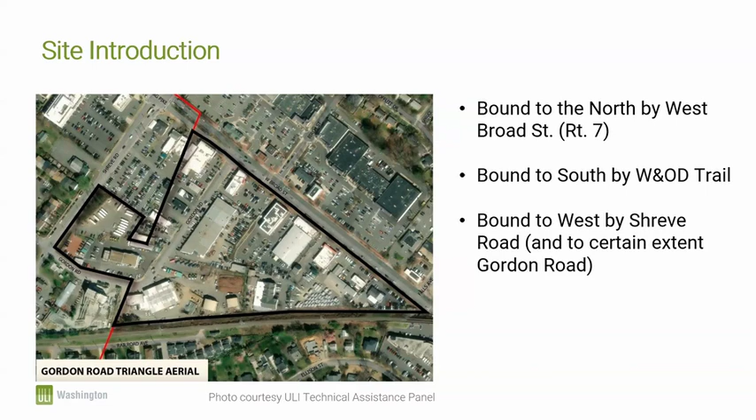From the site introduction, you can see it's outlined here: to the north bound by West Broad, Route 7; to the south by the W&OD Trail; and to the west, Shreve Road, and secondarily by Gordon Road as well.

Digging slightly deeper, one of the unique opportunities of the site is the current mix of uses. You can see on the right a relatively exhaustive list - from the city's perspective we have parking buses, a recycling center, the warehouse, the actual Department of Public Works, a hypothermia shelter, the police impound lot. We also have examples of auto body shops - Caliber, Smokey's, FC Auto, Paramount, Beyer, Volvo, Kia, U-Haul, and the little parcel with Sweet Rice.

We think this is one of the unique opportunities to synthesize and bring together these landowners on behalf of the larger Gordon Road Triangle, along with the city of Falls Church.

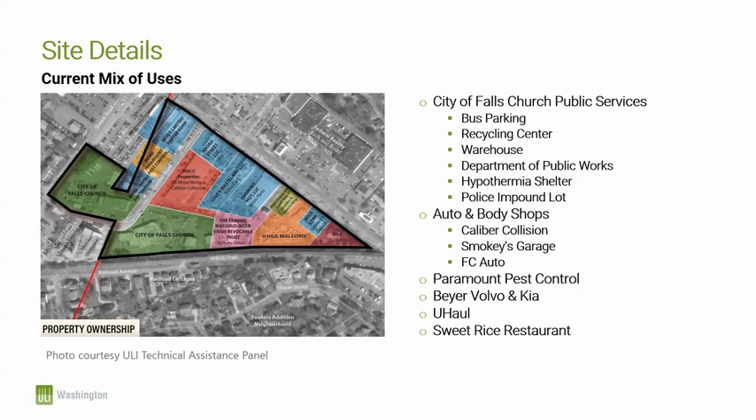Digging a little deeper from a site detail perspective, one of the things the panel has discussed - and you'll see details shortly - is a recommendation to the city to think about and consider developing and investing in your parcels first. We think these two parcels are the catalyst for the larger Gordon Road Triangle. This has to happen first, and everything will flow from that.

We heard directly from the business owners and landowners yesterday that they are willing to enter into this project with the city. They just need the compelling vision from us and the larger plan for Gordon Road to come fully on board. We think that from the city's perspective, starting with your parcels will really set that course in motion.

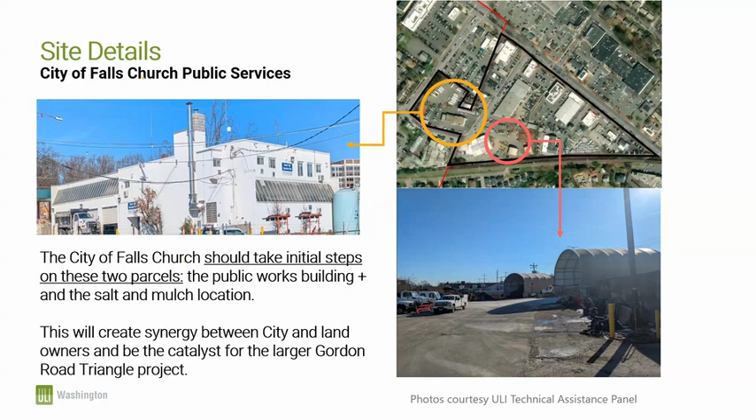One of the recommendations you'll see later has more detail around the tree canopy. There's very little tree canopy currently on the site. We've also identified areas of frequent flooding, which inform some of the vision pieces of what you'll see later.

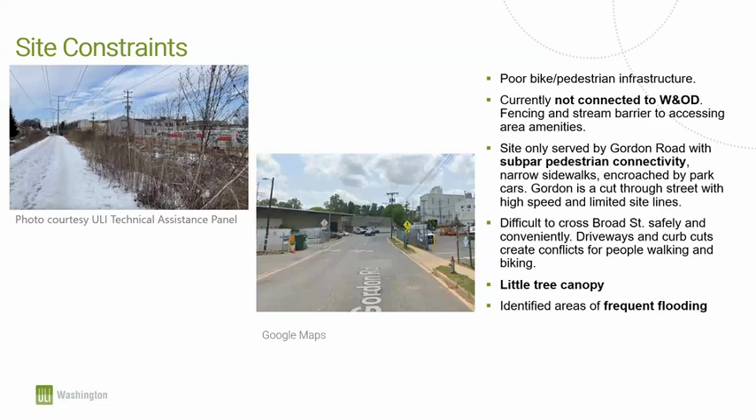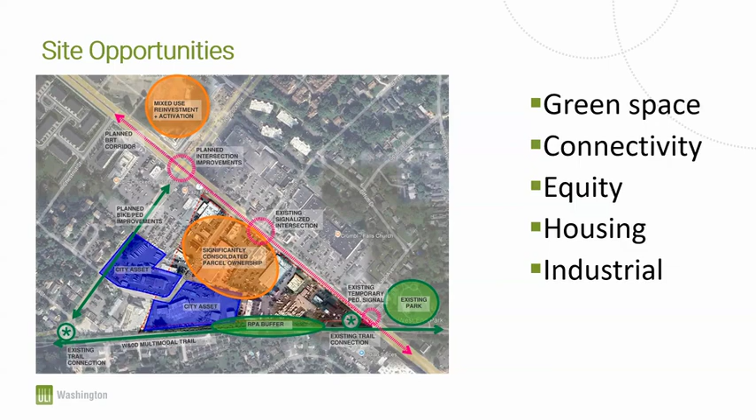Having outlined the process and the task at hand and understanding the current status of the Gordon Road Triangle, we're going to move forward into the feedback we got from our various focus group members and area stakeholders, how we analyzed that in different ways, and how we're utilizing it in the planning process going forward. At a high level, some outstanding items we continue to hear focus on green space, improved connectivity in, around, and through the site, equity, creating equal access to any reinvestment that occurs on the site, and the need for housing at various levels. But also, most importantly, this is currently an industrial area that serves a lot of needs, both for the city and the city's residents. So we want to make sure we're accommodating these uses moving forward.

Green space: the site has the fortune of aligning with the W&OD trail, a heavily utilized piece of cycling infrastructure that stretches throughout the region, and is also at the gateway of the city. Our plans are to utilize that access point, be cognizant of sensitive environmental areas on the site, and pull those same elements into and through the site, creating natural elements throughout the revised plan.

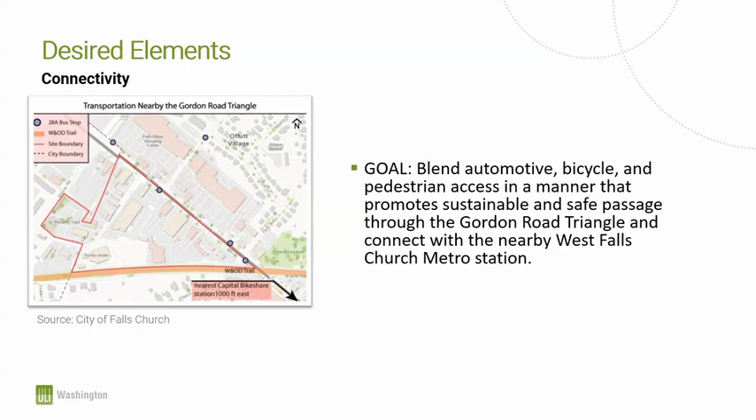Connectivity: the site fronts on Broad, W&OD, and Shreve Road, but the connectivity currently in place needs a lot of revision. We want to focus on automotive, pedestrian, and bicycle traffic through and around the site, connecting it not just around the site but also to the metro location to the west.

Equity: any reinvestment plan such as the one we're contemplating carries the threat of displacement and lack of equal access to that reinvestment. So we want to make sure we're focusing on that as a priority.

Housing is in great need throughout our region and would be a crucial element of the plan. We want housing provided in a range, not just market rate, but also workforce, affordable, and attainable housing, with a heavy focus on the city's hypothermia shelter currently in the triangle. We've heard a lot of feedback about interest in improving, modernizing, and expanding that facility, so we want to make sure that's a focal point.

Finally, industrial uses. We're contemplating different ways where industrial use is not just the DPW facility, so crucial to the city, but also private sector industrial uses like automotive fabrication and other light industrial uses the city depends upon.

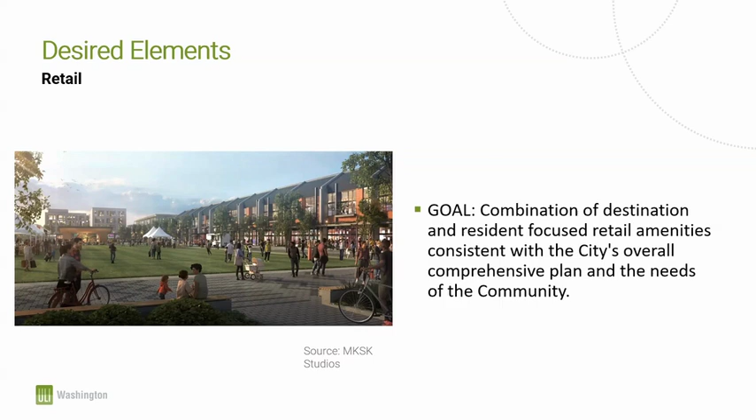Last but not least, retail. Retail in any mixed-use plan like this needs to be addressed. There will be needs for new residents, destination retail opportunities for surrounding residents, so we want to balance community needs with the city's comprehensive planning in place.

You've heard us talk about this framework plan idea, and I want to explain what we mean by framework. It relates to the city services and the ability to unlock redevelopment and improvement of those spaces first and immediately, to address those critical needs. We believe with two or three key chess moves we can do that quickly up front, and then have flexibility in the rest of the triangle space for how that plays out.

So instead of talking about this as a master plan, which makes it sound like we have all of the answers in 2 days, we're talking about this in terms of a framework plan to give you the tools you need to unlock those first few key chess moves. The rest has a little bit more flexibility to evolve in response to the community, the market, and appropriate timing.

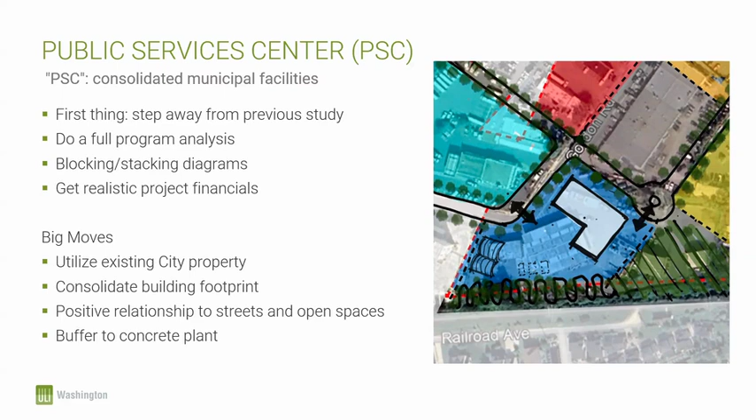Many of you are probably familiar with the new Arlington Art facility. If you haven't seen it yourself, you're probably aware that it has been completed. And so this was one element that was in our briefing book that we heard from the city. We're just putting it back out there as what we think is a good idea to model some of those aspects after. We'll turn it over to the next one.

So Susan and Colin gave you and talked to you about that framework plan, and now we're going to get into some of those elements of that plan. So in the information we got from the city and speaking with stakeholders, one of the questions was looking at possible land uses.

And one of the things we heard both from the city and the stakeholders is that there is a want for housing. And what we've heard is looking for mixed income housing to include affordable housing. So we definitely thought, again, looking at the framework plan and the opportunities here, there is an opportunity to provide housing, have higher density, mixed use residential along the Broad Street frontage of the property.

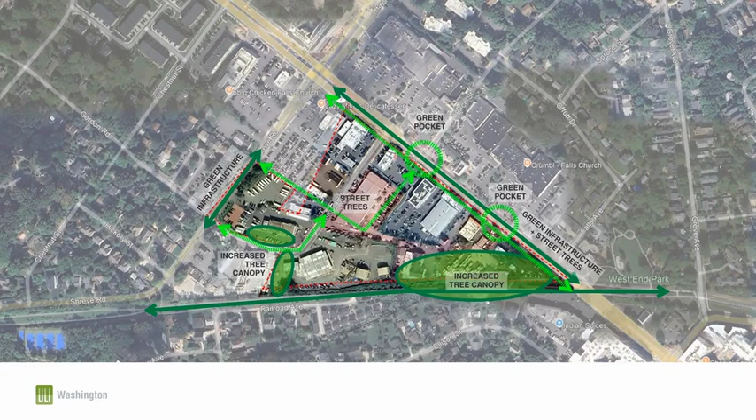One of the things we heard was about the existing tree canopy—there's not much of it. So a major goal, and we think a major opportunity, is to increase the tree canopy within the triangle. Our recommendation is that the overall minimum tree canopy goal should be 15%, and we think there's a great opportunity because of the site's location and proximity to the W&OD trail and the RPA buffer area located there. That's an area where you could get substantial tree planting to really meet that 15% goal.

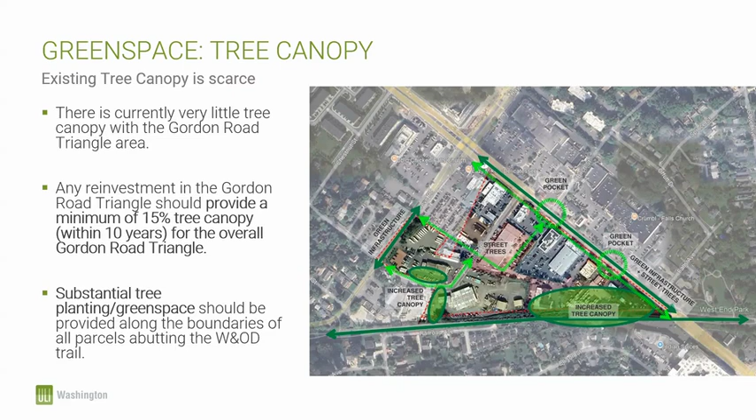So again, the W&OD Trail is a major opportunity for this development. You've got a regional trail that extends from Arlington all the way up to Purcellville, so it's heavily used. I've done a lot of marathon training on this trail, and I've gone through this area many times. Right now, the site has no relationship to the trail.

We think an example of providing that relationship with the trail is in Vienna—there's the Caboose Brewing Company. They have a brewery that's right on the trail, and it's become a real destination. I know running groups and biking groups that start there and finish there, which creates that relationship with the W&OD Trail.

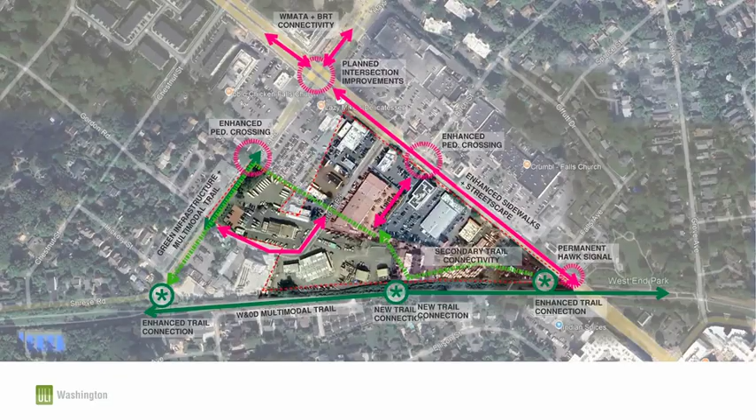On the W&OD, some recommendations are to enhance connectivity—we talked about adding a pedestrian and bike connection down by the Gateway Greenway. This would be a gateway into the site, a gathering space that would feed into that area. But that was just one connection.

Also, this area here would improve the connection at the base of the bike-ped bridge and really open that up. We spoke about open space recreation opportunities where we could do a parallel, slower shared use path for exercise. I know the dual paths exist elsewhere, and maybe this stretch of the W&OD will get that too, but it's an opportunity to provide some of that slower trail on the Gordon Road side of things.

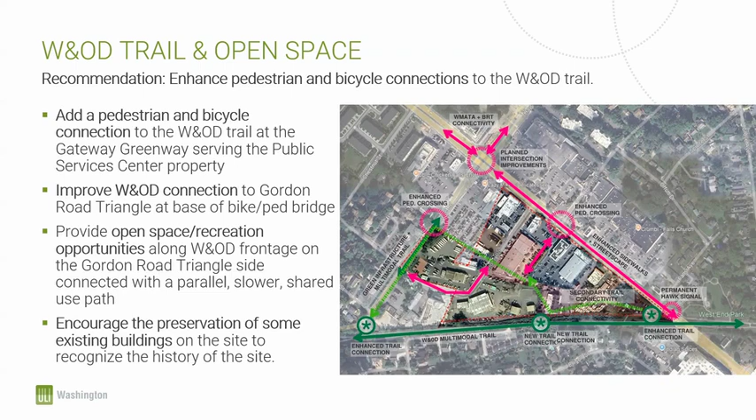And we talked about the preserving of the buildings, so we can move on.

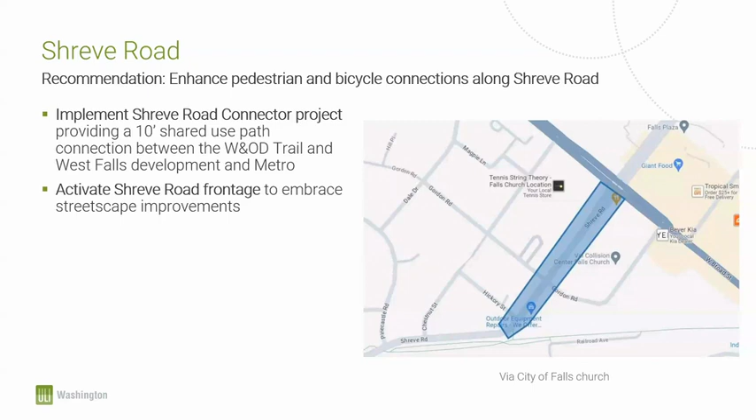So on Shreve Road, which is another important connection, there's a planned project for that roadway - a 10-foot shared use path connection between the W&OD trail and up to the West Falls development and subsequently the metro. There were also recommendations that as this comes online and redevelopment starts, we really activate the Shreve Road frontage to enhance and utilize those streetscape improvements.

And then on Gordon Road, as it is today, there are a lot of employees down in that area. We heard it was not safe for them to be crossing Gordon Road - there are sightline issues. So we really want to make it more pedestrian friendly for those using it now. Providing traffic calming there, especially near the operations center, is something that could be done relatively near term, including a high visibility crosswalk, better delineation of pedestrian zones, and signage for drivers to expect pedestrians.

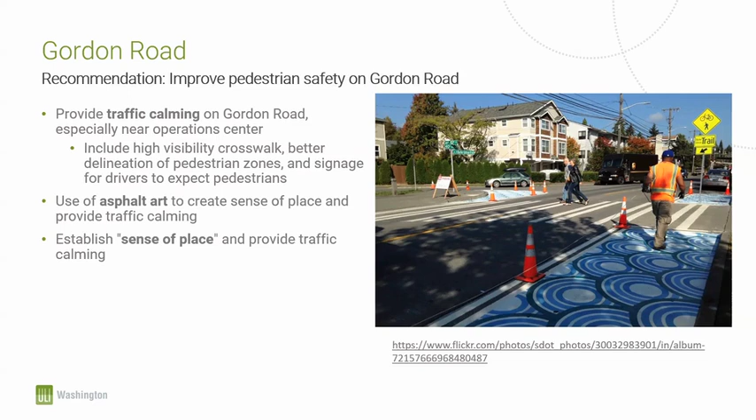The thought of using asphalt art - there was a lot of talk about murals and things like that in this area to really utilize some placemaking. That also provides traffic calming because it creates a sense of place. The more we can do that right down in there, that will help with traffic calming as well.

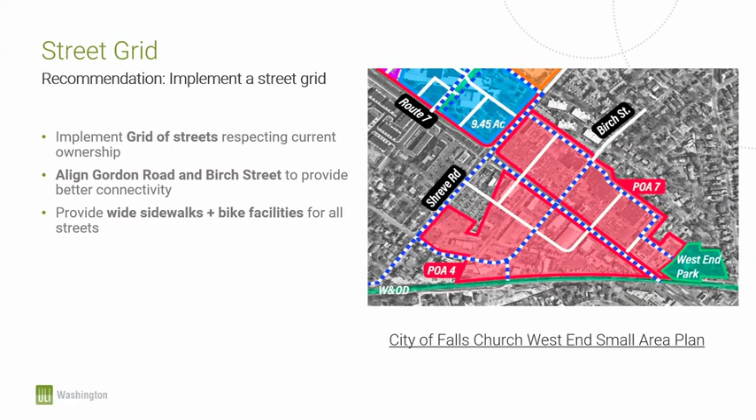And then that street grid - this is going to be longer term, so we talk about phasing. Longer term, we can implement that grid of streets, respecting current ownership. That's part of the phasing - when they're ready to move, that's when it can come online. Aligning Gordon Road and Birch Street to provide better connectivity, all of which should provide better, wider sidewalks and bike facilities for all. And then on Broad Street - Broad Street is a challenge.

Walking along there can be difficult - there's a lot of busy traffic, hard to cross conveniently. We mentioned this during the constraints component, but here we're recommending making that temporary signalized crossing near the W&OD bridge permanent, with a pedestrian activated signal and a high visibility crosswalk. We suggest adding a pedestrian activated signal between Birch and Falls to allow some crossing over into the shopping center across the way, between the signalized intersection and the new temporary crossing location. And then, of course, implement those pedestrian safety improvements at the Broad Shreve intersection.

Now, this is part of the current redevelopment going on at West Falls. It's an ongoing project - I know they're working to refine and make it even more pedestrian friendly. So moving that along and continuing to implement it will be huge. That would really improve those crossing options.

And then improving the streetscape is part of the redevelopment. It's beautiful - it's brick, there are trees and what have you - but we did hear a lot about the bricks being trip hazards, and even some of the tree boxes, because they're elevated, being trip hazards. So providing a planting strip with bioretention to create healthy street trees, so the bioretention areas have the trees and the sidewalk stays free and open, replacing the bricks to be more ADA compliant, and trying to reduce those curb cuts because there's a lot of conflict in there as redevelopment happens.

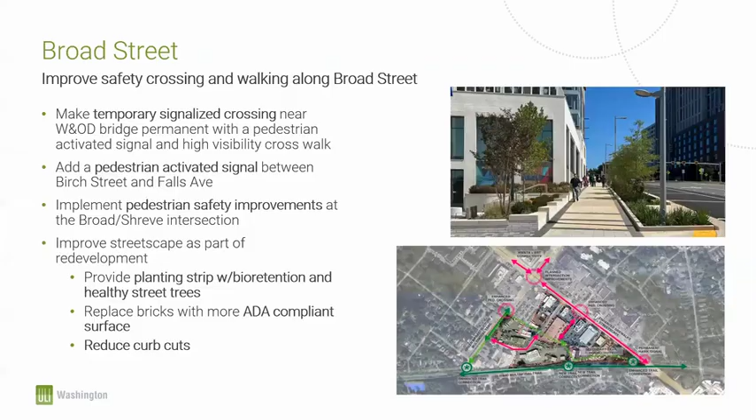Divided as, this is kind of a placeholder. It's not saying this is exactly what it's going to be long term. But we do have square footages for each one of these properties. And I think one of the things that's important, and we alluded to it, is we've really tried to respect the property lines. So if somebody is going to need to have a new road, they're not getting their ox gored by giving up something that goes through the middle of the property that makes it unserviceable.

And there's actually a mechanism called reservation density. So if they do provide right of way, even though it's now in public ownership, they can still use that to calculate density.

Yeah, I understand you're trying to follow the existing property line over there. Do you think there's any possibility to do a land assembly somehow?

Well, I think that's what we're talking about. In governance, we're saying, let's get the property owners, or use the city, and maybe the new project manager as implementer, to pull the property ownerships together and see if there isn't some way to work out a common approach going forward with all, or as many of the property owners as you can get.